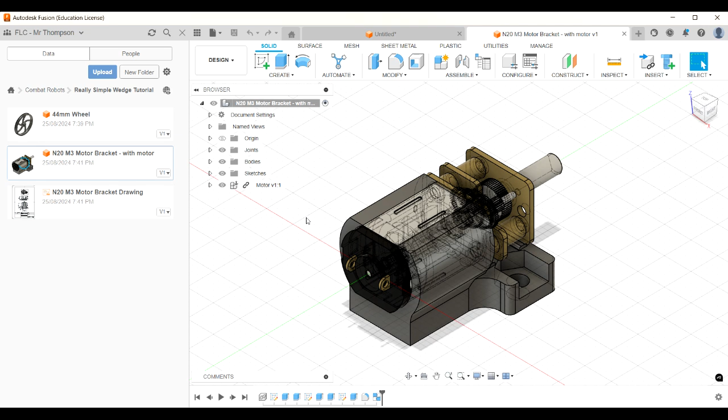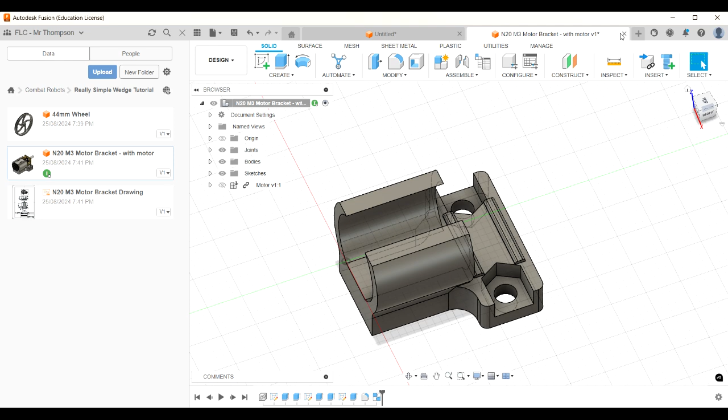I'm going to give you these brackets here. Let me just hide that so you can see. So I've built these brackets, and they're quite nice little brackets. So when you slide the motor in there, it snaps in quite satisfyingly, and it's got these holes there, and you can see some spaces for the nuts, so that you can screw them into the robot body that you design. So let me just close that. I don't need to save that.

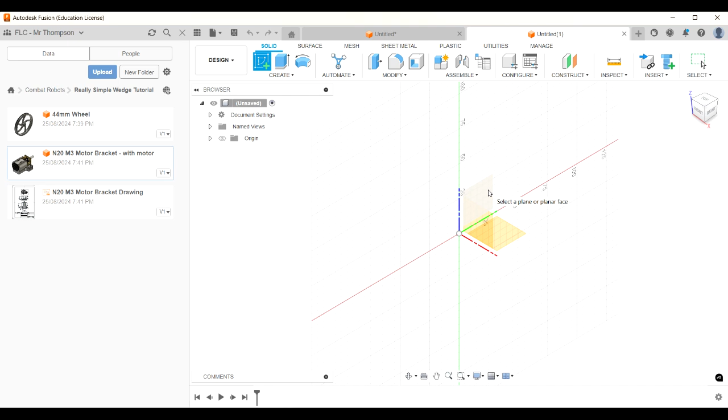All right, so we're going to build something that looks a little bit like that. So let's get started. We'll create a new one. So we've got a brand new model here. And we're going to start by drawing a sketch. So I'm going to click on Create Sketch. I'm going to click on this side plane here, like that. And I'm just going to zoom out. And I'm doing that zoom out, zoom in thing with my mouse wheel, which I find is an easy way to move around.

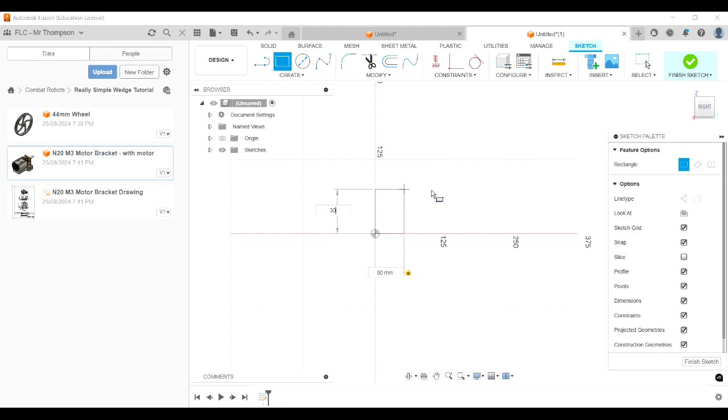Now R for rectangle, and I'm going to click on the origin there, and then I'm going to come out by, let's see if I type 50, and then tab and 30. That's the dimensions I want. Okay, let's just zoom in a bit. And you can see when I use my wheel mouse, wherever my mouse is pointed, that becomes the center of my zoom. So that's pretty handy to know. All right, so zoom in a little bit like that.

Now I'm going to do a circle. So C for circle. I'm going to come up here somewhere and do a circle, and it's going to be any old size, about that big, like that. I didn't specify a diameter because I don't want to. I'll show you why in a moment. Now I'm going to make a scoopy front. A technical term. I'm going to make a scoopy front on my wedge, so that it's good at getting underneath other robots.

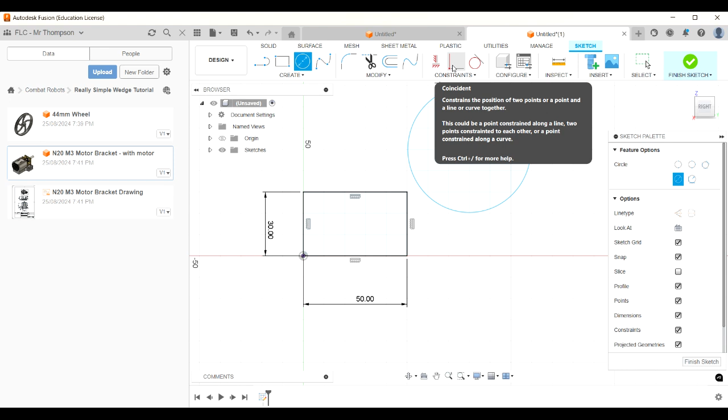Now the edge of that circle needs to be on that point there. So I'm going to use a constraint, this coincident constraint. If you can't see it on your computer, you might have to come down here to find it. Coincident constraint, and I click on the outside of the circle and that point there. So that point and the circle are now constrained to be aligned. So if I press escape, and if I try to grab the center of the circle, oh, I can't do that. Anyway, never mind. It's constrained.

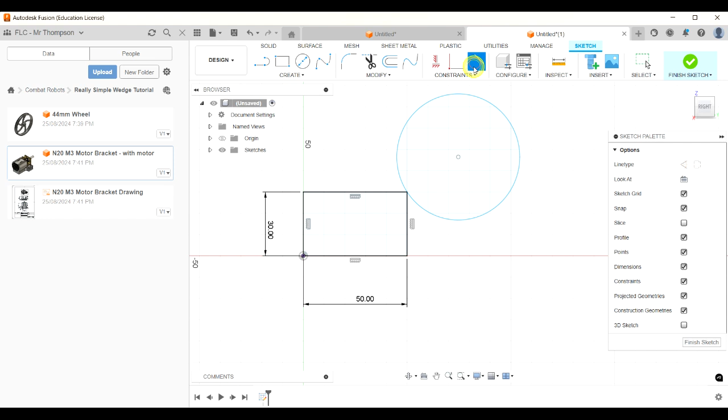Okay, now the other thing I want to do is put the bottom of that circle on that line there. So if I use a tangent constraint, and click on that circle, I can't click on that line, but I can come over and click on that line, and it puts on a tangent as if that line was extended. All right, that looks pretty good.

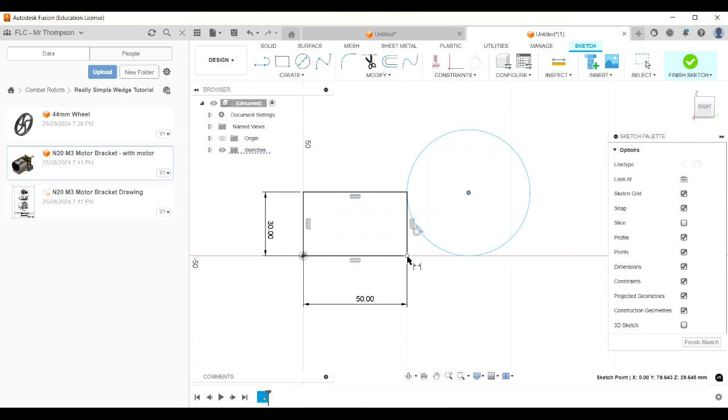Now D for dimension, and I want the distance between the center there and this point here to be 50 millimeters. And the reason I want 50 millimeters is the whole length of my combat robot can't be more than 4 inches, which is about 101 millimeters. So if I keep all the dimensions of my robot, height, width, depth, within 100 millimeters, I'm okay. If I go longer than 100 millimeters, my robot's not legal.

So that's going to be the shape of my robot. Okay, L for line, and I'm going to click on that point there and join it with that point there. And now I'm ready to extrude. So E for extrude.

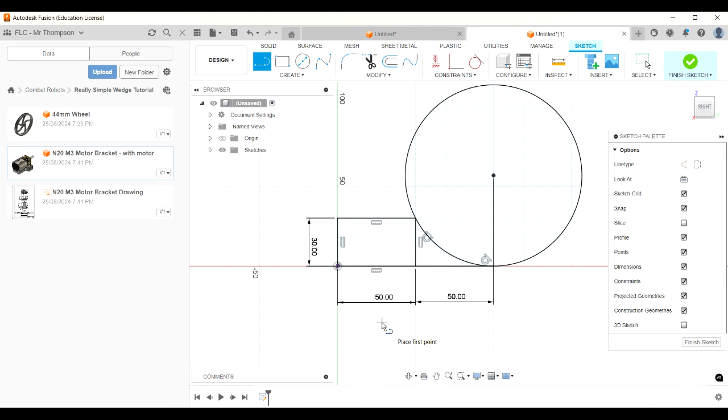I'm going to pick, let's see, that shape there, and I like to click on home so I can see what's going on. Just zoom out a little bit, zoom back in. Okay, I want to extrude both sides, symmetric like that. Symmetric. This is really good practice.

If you're building something that's symmetrical, you should build it symmetrical around your origin point. And the reason for that is you'll see later on when I want to mirror things, it just makes mirroring so much easier because we can use the origin planes as the reflection plane. I'll show you what I mean later, but trust me, you want to extrude symmetrically where you can.

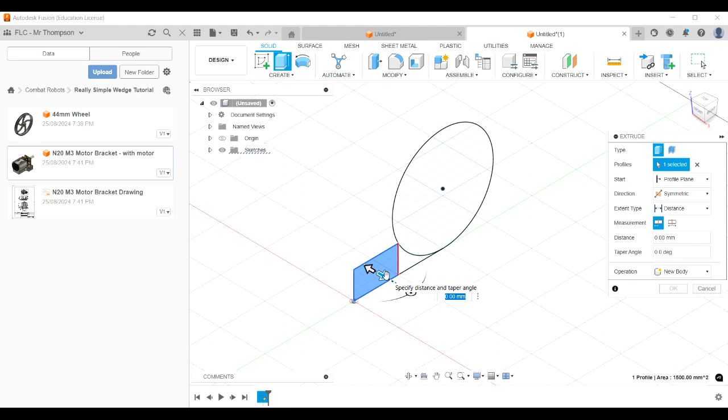So we're going to come out this way. How far do we want to come out? I think, actually, I'm going to come up here. I'm going to go measurement the whole length. I want that whole length there from one side all the way to the other to be 75 millimeters, like that. So whole length, 75 millimeters. Okay, there we go. Now, oh, look at that. It's created a body and it's hidden the sketch.

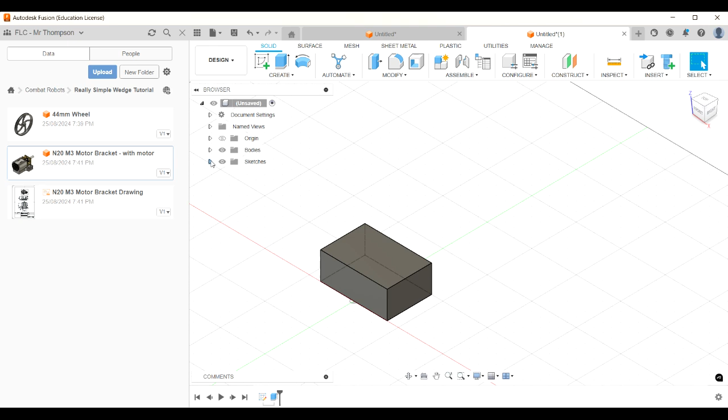Let me just fix a few things up. That sketch that I just drew, I'm going to name that. I'm going to call it, I don't know, the side profile. And that body that I just created, let's call that, actually, you know what? It's not a shell yet, but it will be a shell when I'm finished with it. So I'm going to call that the shell of my combat robot.

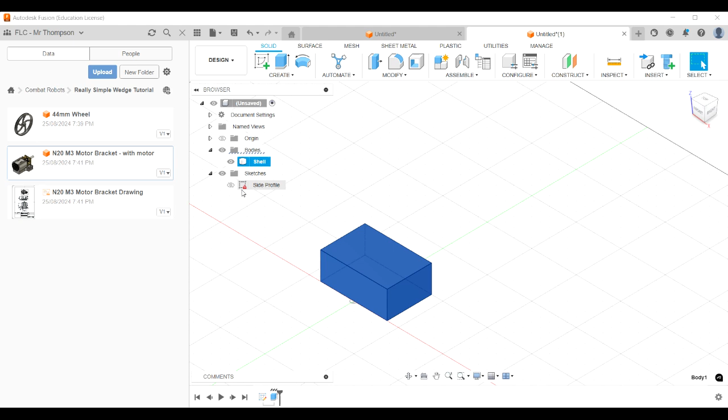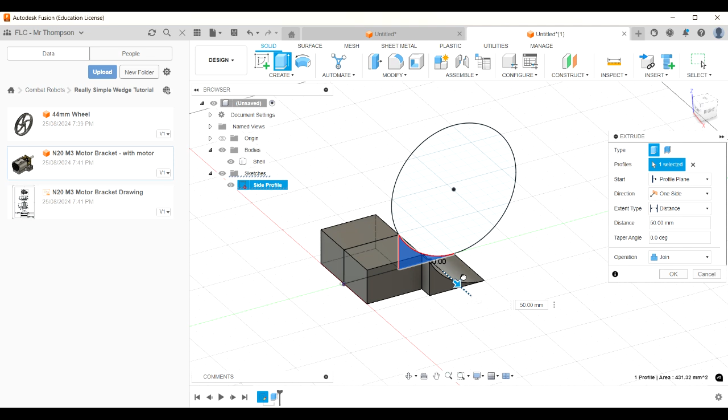All right, so like I say, we're not finished. I'm going to turn that sketch back on because I haven't finished extruding from that sketch. When you extrude from it, it automatically hides. So I'm going to unhide it because I want to do another extrude. So I'm going to come around here, E for extrude, and I'm going to select that profile there, and I'm going to extrude that. Now I also want to extrude that symmetric.

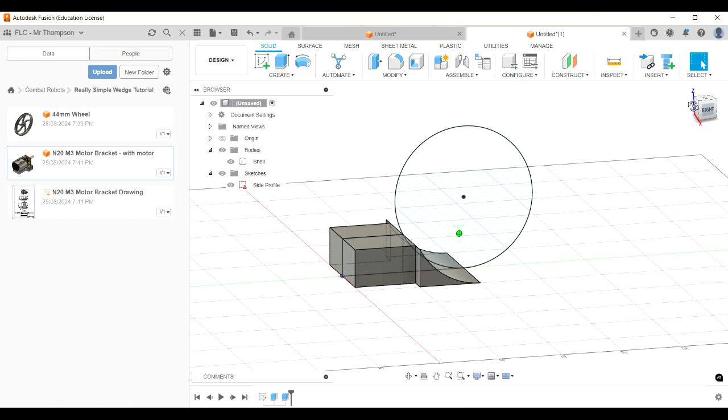Whole length, the whole length needs to be, I'm going to go my full 100 millimeters. I want that to be the full allowable length. It's a join extrusion, which is good. It's going to join these two bodies together, so they're one body, like that. There we go. Now I don't need this sketch anymore, so I can hide that sketch like that. Now that's solid. I want it to be hollow, so I'm going to shell it out.

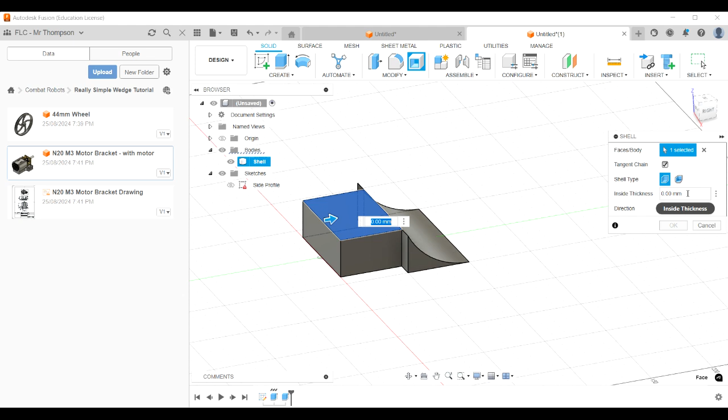So if I click on this shell here, again, if you can't see any of these buttons, you'll find them in the menu underneath. So shell, and if I click on just this top face, then it'll leave that open, which is what I want. Now let's see, I want an inside thickness of 1.6 millimeters. I think 1.6 is reasonably strong, but not too heavy when we 3D print something. And our layer height is 0.2, so I made it a multiple of 0.2.

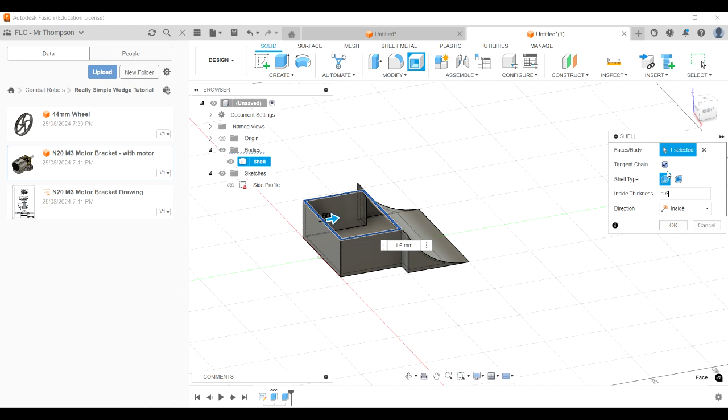All right, the direction is inside because I want that thickness of the shell to be inside what I've already drawn. And I'm going to click OK, and there we have a shell like that. All right, so far so good. Now it's time to bring the motor in. Now, I'm not going to show you this.

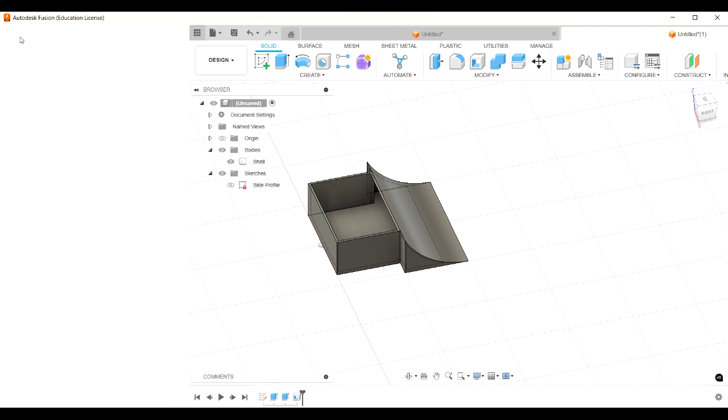It's pretty straightforward. I will put a link to the motor in the description, and you will have to download that motor and the bracket to your computer. It'll be a file, I'm not sure if it's going to be an STL or a STEP file, but anyway, download it to your computer. Then you'll click this upload button. Remember, that's my data panel if you can't see it, the 9 dots. You're going to click on the upload button and upload the bracket with the motor, and then you'll have it here so that you can choose from it.

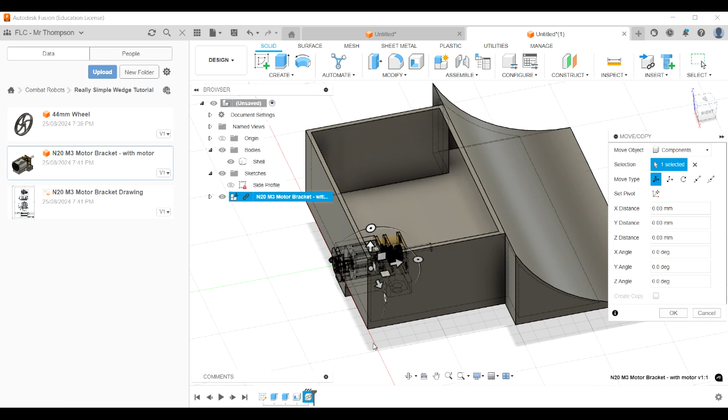So I'm going to grab that, bring that anywhere, just plonk it anywhere. And the first thing I'm going to do before anything else, I'm going to rotate it. So I haven't clicked OK yet. I'm just going to rotate it by minus 90 degrees like that, because that's the orientation I want, and click OK. Now you can see it's not really lined up particularly well, is it?

It's sort of hanging out the bottom there and it's in a weird spot. I'm going to align it right into this corner, and the reason I want to do that is because then I can move it by an exact distance to where I want it.

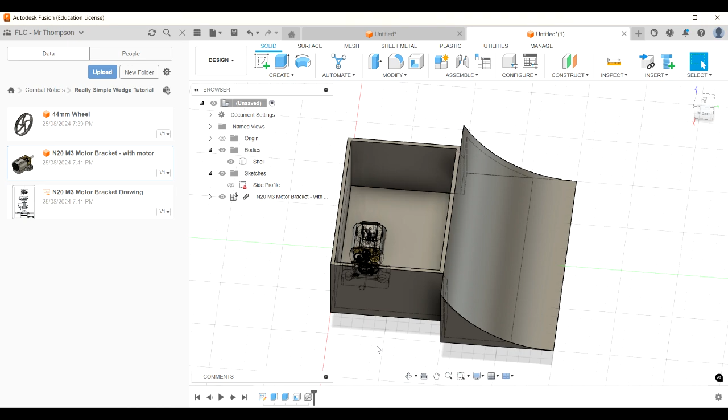So now before I do that, see this little anchor sign here? That anchor sign actually means that that component is grounded to the parent. That means I won't be able to move it around yet. So I'm going to unground it like that. Now I'm going to be able to move it. Okay, so the anchor sign's gone.

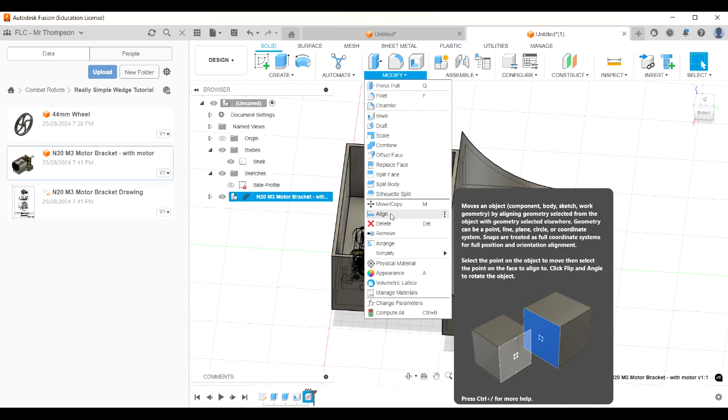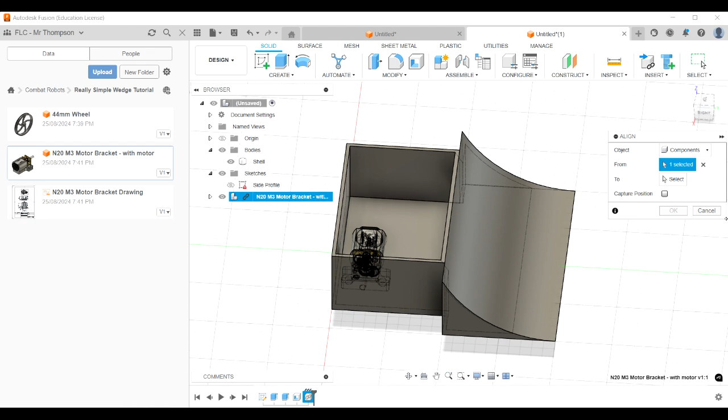So first I'm going to select the floor, the inside floor of my, well, actually, you know what? I won't do that. I'm going to select the back wall, the inside of the back wall. Now, not there, not there, don't want that. I just want any old boring, ordinary place on the back wall like that.

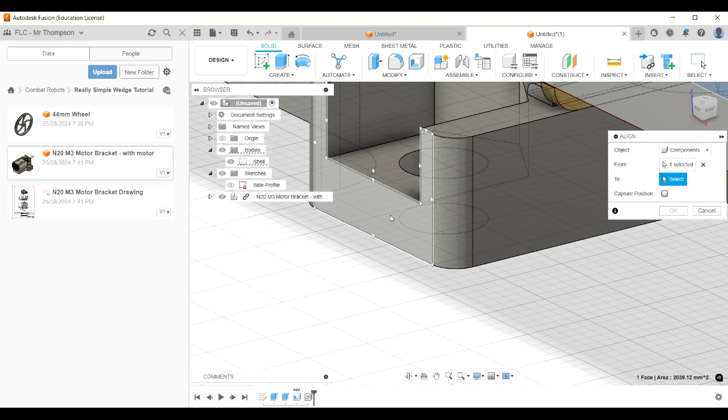Click like that. And then I'm going to select my other face, which is this one down here, that one there. And when I click on that, again, not in any special spot, just a boring part of the face like that. I don't know if you saw that, those two are now aligned. So if I scroll this around, you can see that they're aligned.

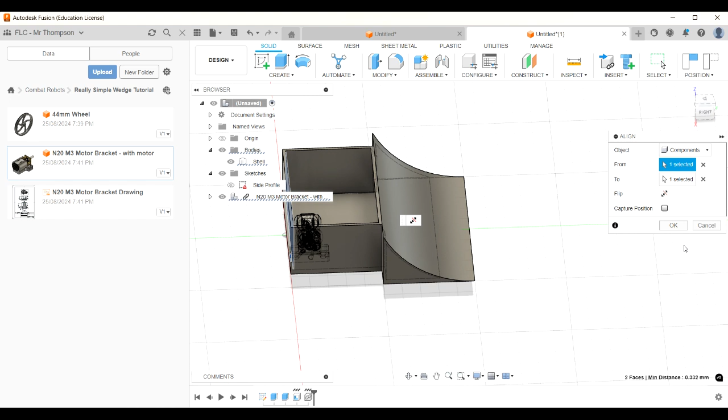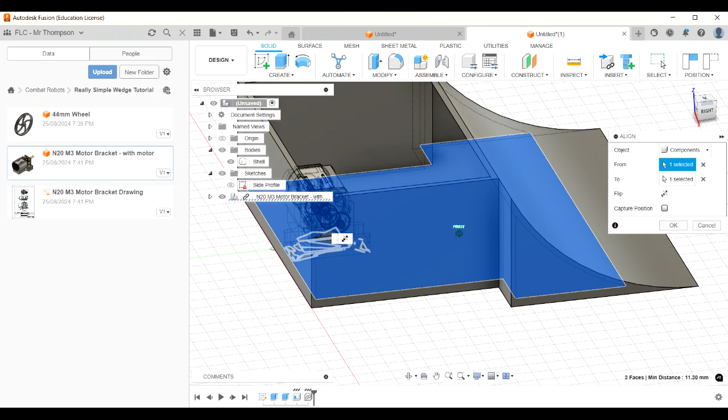Okay, I want to do a bit more aligning. Actually, I won't click OK because I can just keep doing this aligning until I get it right. So again, I'm going to select the floor here, the object I want to align to, and then the object I want to move: I want this base of the bracket to be aligned with that floor that I just selected first. So if I click there, okay, that's aligned. Good.

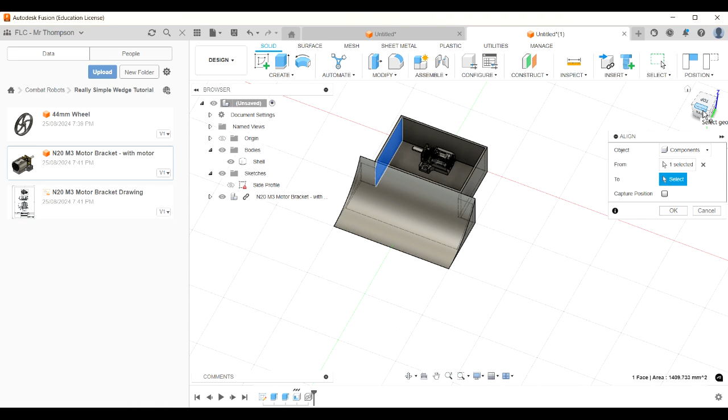All right, and one more alignment I want to do. If I come around, let's see, yuck. All right, there we go. I want to choose that wall there. So again, not the center, just a boring place on the inside of the wall like that. And then I'm going to come around like this and zoom in because I want the front of that bracket to line up with that inside wall that I just clicked on, like that.

Okay, now I'm going to click OK. Let me just click on top there so you can see what's going on. So that motor there is sitting right in the corner. Now, I actually don't want it to be there. I want it to move out a little bit, but because I've started it there, I can move it by a certain distance and know exactly where it is.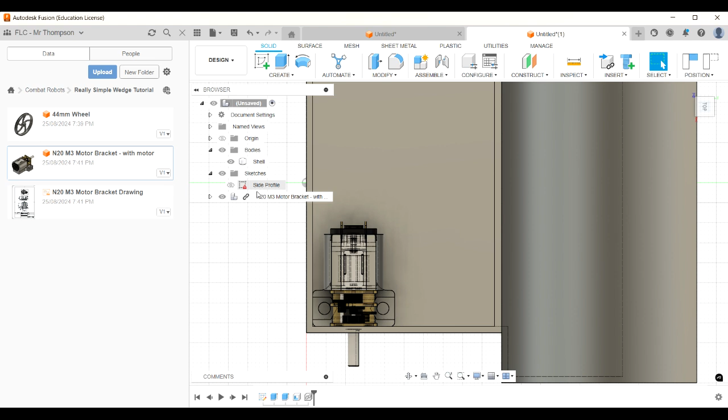So in my browser tree, I'm going to click on that motor and bracket. Then I'm going to press M for move, and it gives me some arrows here. It's already got Move Components, which is good because I selected a component. And I'm going to move this.

I move this 13 millimeters. Now why is that? Because I know that my battery is 15 millimeters wide. So from here to here, I want that to be 16 millimeters. And I know that from here to here, that distance is 3 millimeters. So if I move my motor out by 13 millimeters, then this wall is going to be 16 millimeters from here, and that will fit my battery in behind the motors quite nicely. So I've done that.

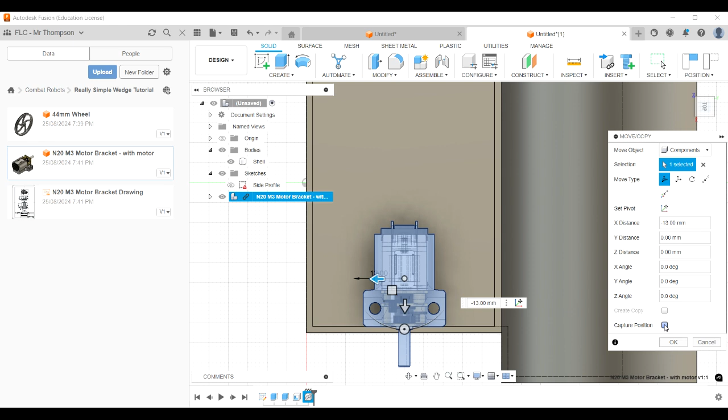Now the other thing I'm going to do before I click OK is capture position, and that finalizes the position. So all the moving and alignment I've done is finished now, and it puts that captured position on my timeline. Okay, like that. Click home so we can see. All right, that's pretty good. Now I do want another one on the other side, but I'll show you a quick way of doing that later.

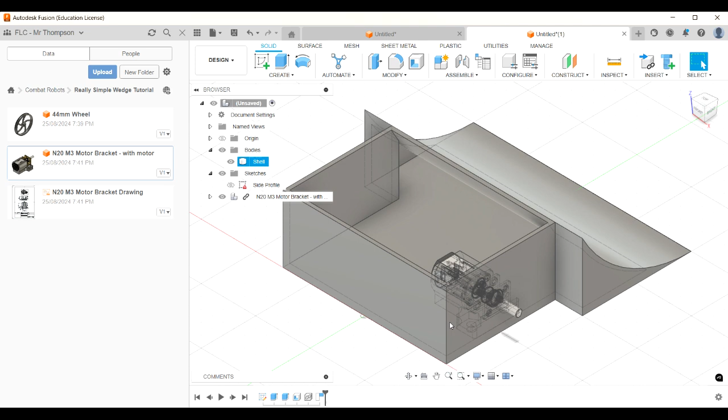First, I'm going to finish this side. So now let's see, at the moment my axle's just sticking through the wall. I need to cut a hole so that in real life I can put that in place, because in real life you can't have two things in the same physical space, can you? All right, so I'm going to draw a sketch.

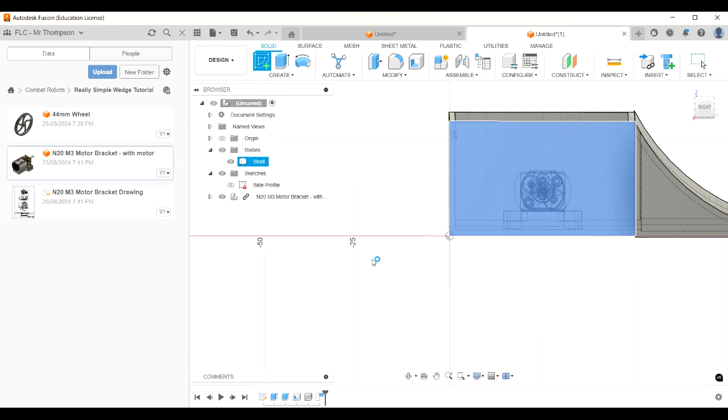So create a sketch here on this outside side wall, like that. Let's zoom in so I can see what's going on.

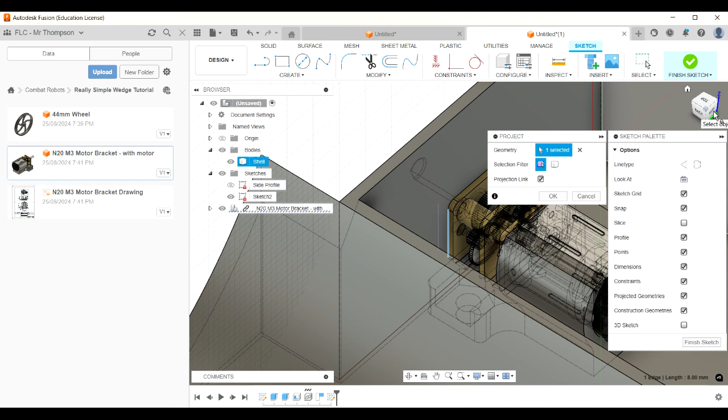Now I want to project some lines from that bracket into my sketch so that I can use them to cut out a shape. So I'm going to do P for project, and come around here like this. I'm going to choose that line there, I want that line as part of my sketch. I'm going to choose that line there also as part of my sketch.

And if I come back around to the front here again, I'm just going to click on the front of that so it's square. If I click on where it says right, that squares everything up. I'm going to zoom right in here.

I would like to select that circle there, but it's not letting me do that. So I'm going to come up here and click selection priority, select edge priority. Instead of trying to select that face on the front, it's not letting me do it. I'll try again. Selection priority, edge. There we go, that's working.

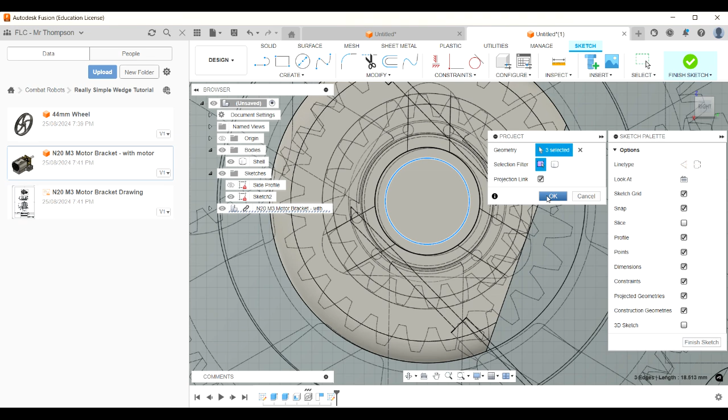So if I click on that edge there now and go OK, now that edge is in my sketch. Can't see it very well, but it is part of my sketch, so I can use it. In fact, more importantly, the center point of that circle that I just selected is in my sketch.

All right, now, I guess what I want to do now — you know what, I probably didn't even need that. Never mind.

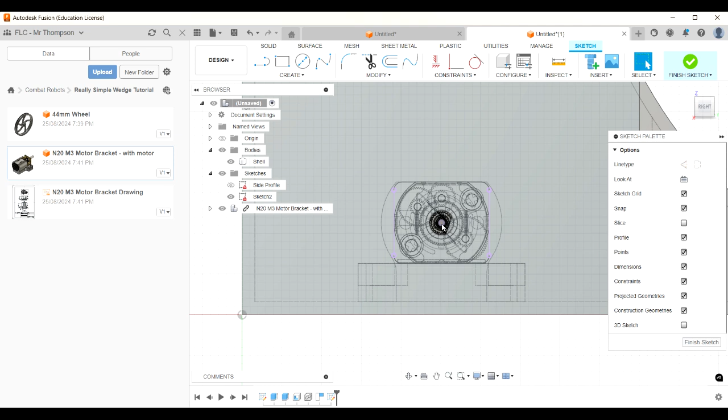We'll keep going. I'm going to do R for rectangle. I'm going to draw a rectangle from this very top here, and draw it down to about here. Now, that's not its final position, but that's okay because I'm going to use constraints to line it up.

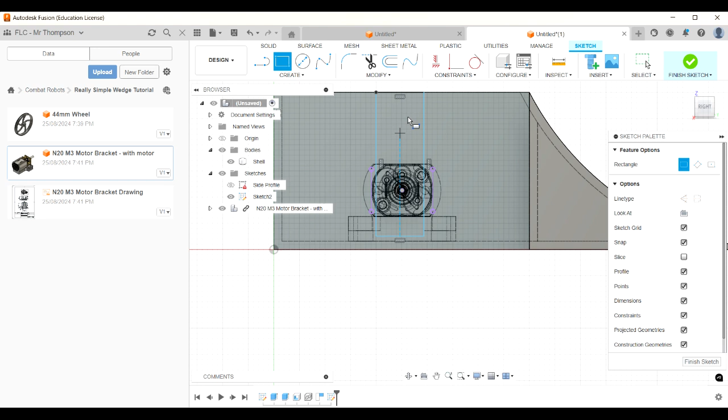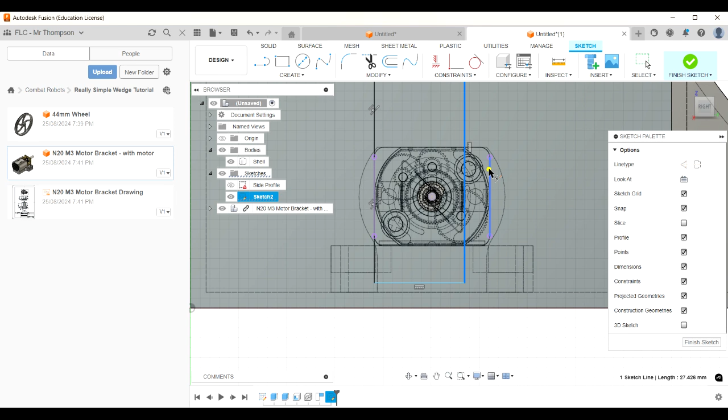So I'm going to come over here on constraints and use a collinear constraint. That means it lines up two lines. Remember I put that line in my sketch, so I'm going to say I want that line and that line to be collinear, I want them to line up. And that line and that line I also want to be collinear. And that line and that line I want to be collinear.

You know what, I didn't need that center point after all, did I? That's okay, doesn't hurt to have it. All right, so there's my sketch, you can see I've got a rectangle here. I'm going to cut that rectangle out.

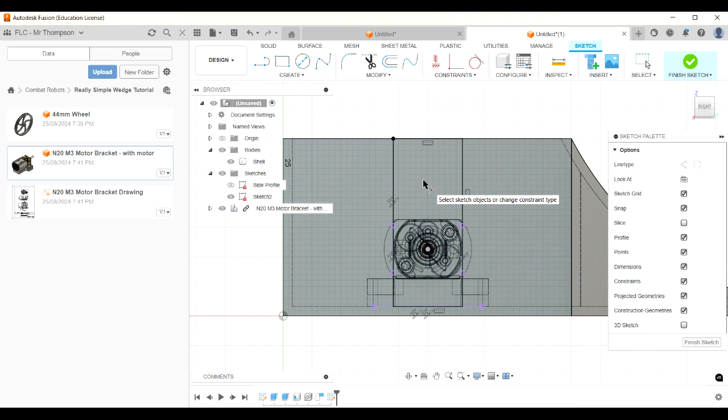So E for extrude, E for extrude. Now, actually, I'm going to do a cut extrude. So I'm going to click on that profile there, and cut it back this way. But I don't want to cut my motor or my bracket, I only want to cut the shell.

So what I'm going to do is just hide the motor and the bracket at the moment because I don't want to cut that. Oh, actually, I just noticed that little hole there — I want to make sure that's included in my cut. I don't want to leave a little gap in the middle there like that. Okay, that's better, that's working.

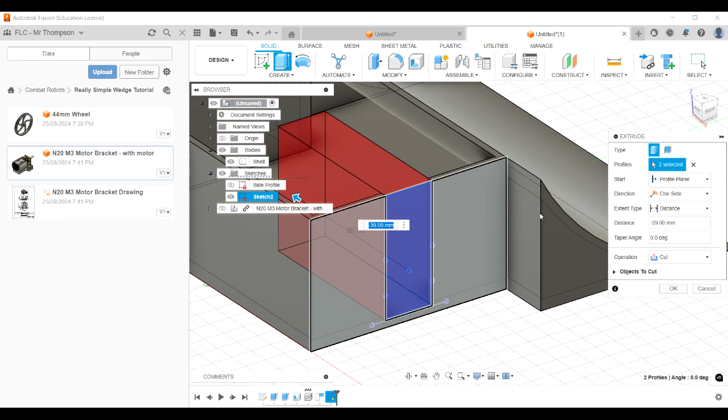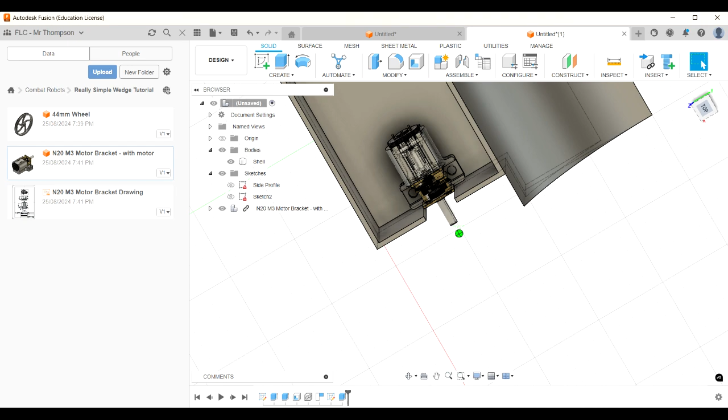Okay, now objects to cut. So if I scroll around using my view cube to the back face there, or the other side face, and click OK — that's cut. Okay, and now I can turn my motor bracket back on, and I can see what that's done. That's created a nice little hole that my axle can stick through, and that'll stop all my wires from getting in the way of my wheels.

Okay, we're pretty close to being done. Let's go to the top. What I want to do now is put some holes so that I can fit some screws that are going to hold this bracket in place.

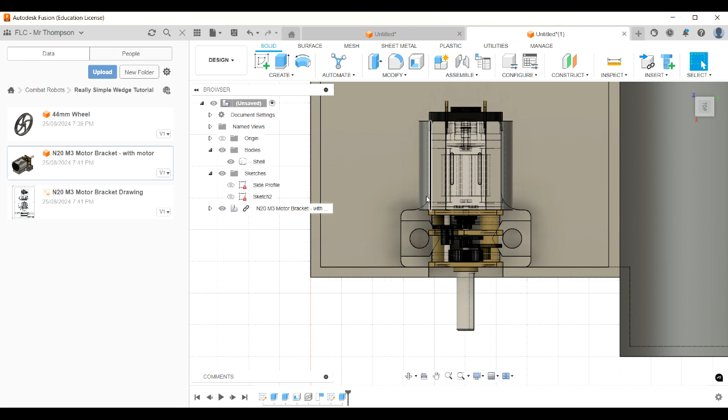So I'm going to do a sketch on the floor, like that. And if I come over here and do P for project again, I'm going to project that circle into my sketch, and that circle into my sketch, and go OK.

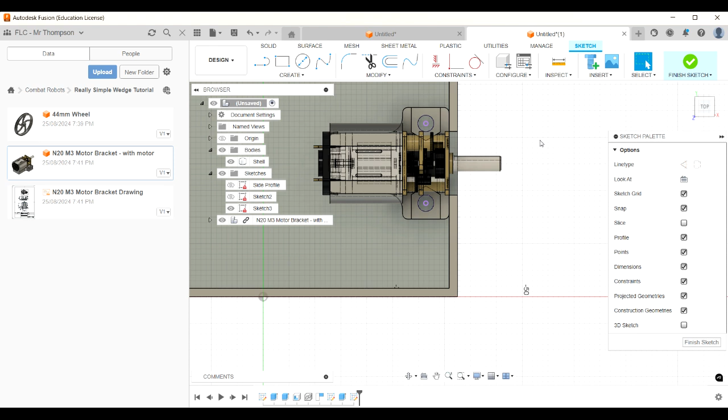Now that those circles are in my sketch, I can do E for extrude, and extrude those shapes, those circles. I'm going to extrude to object, because I want to extrude them all the way down to the bottom, creating a cut extrusion all the way through the bottom of my shell. Okay, like that, and there we go.

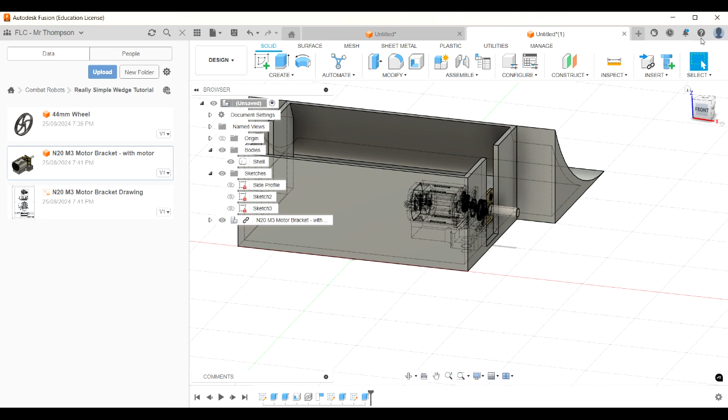So now we've got holes all the way through the shell, and they're perfectly lined up with where I want my bracket. Now you're probably thinking we've got to do all of that again over on the other side, except we don't. We're going to use a shortcut.

We're going to mirror. So I'm going to click on that bracket here in my browser tree, and create a mirror. The object's already selected because I selected it first. If I click on mirror plane, because we were clever and built our body symmetrical about the axis, I can use that.

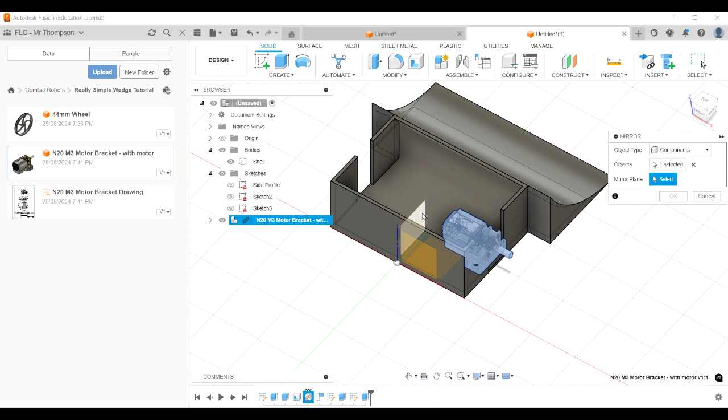Or about the origin, I can use that axis plane there as my mirror plane. I don't have to go and build a mid plane or anything like that. So if I click on that, you can see it's going to create a mirror like that. If I click on OK, there we go. And we've got the other one in.

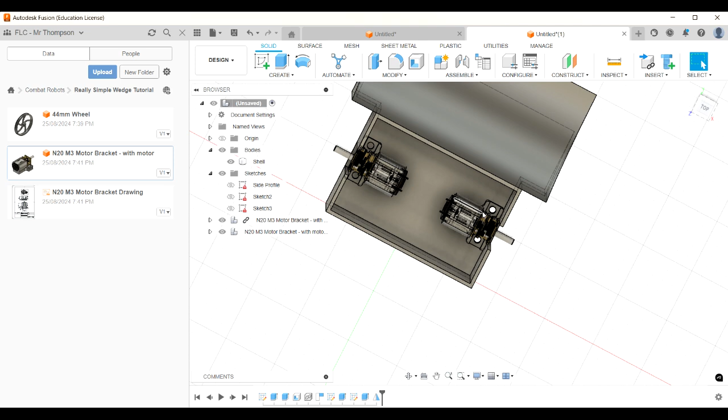Now the only thing I haven't done is I need those holes in there as well, so I can mirror those too. Again, I'm going to click create mirror. Last time we mirrored components, it selected automatically because we selected a component before we chose mirror. This time I want to select features.

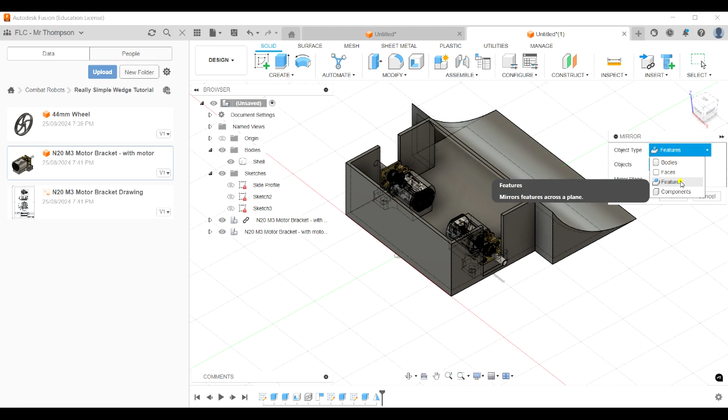The features I want to mirror are these holes, so I'm going to click on those holes. My mirror plane again is going to be that plane in the center. And for the type, I find optimized works. I'm not really sure the difference between optimize, identical, and adjust, but if one doesn't work for me, I just try another one.

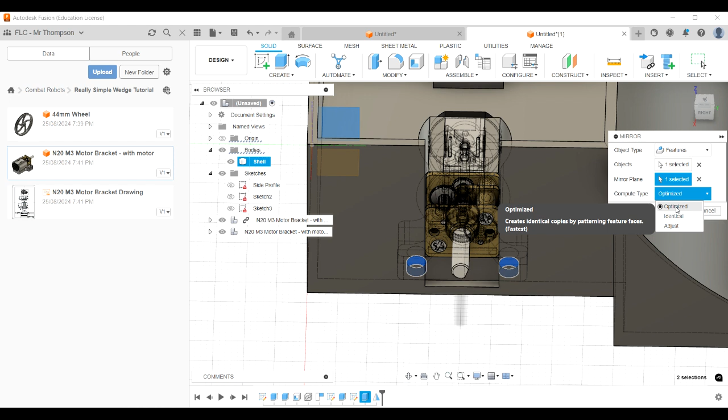Sometimes you get weird results. I find optimized tends to work nicely. So if I zoom out and zoom back in, and press OK, like that, if I scroll around like this, there we go - we should find that there's holes in the bottom on both sides.

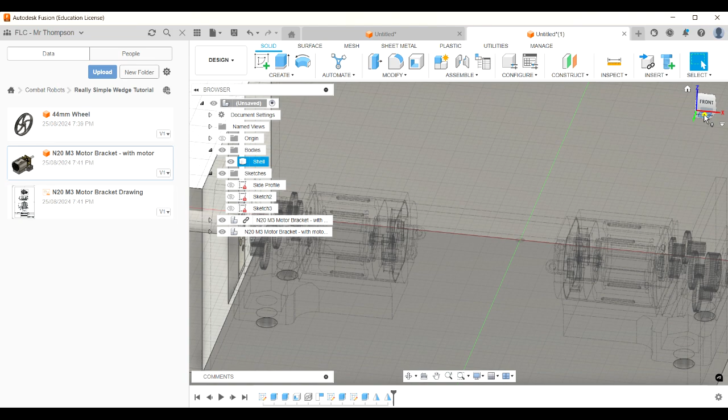Okay, and you know what, that'll do. We will create a lid in another video, but I think now is probably a good time to stop and 3D print your chassis, 3D print your shell, and practice putting it all together, making sure everything fits.

Once we're happy that everything fits, you know what, you could even race that around without a lid on it. We'll come back later and put a lid on. So, okay, let me just quickly show you - you probably know this already.

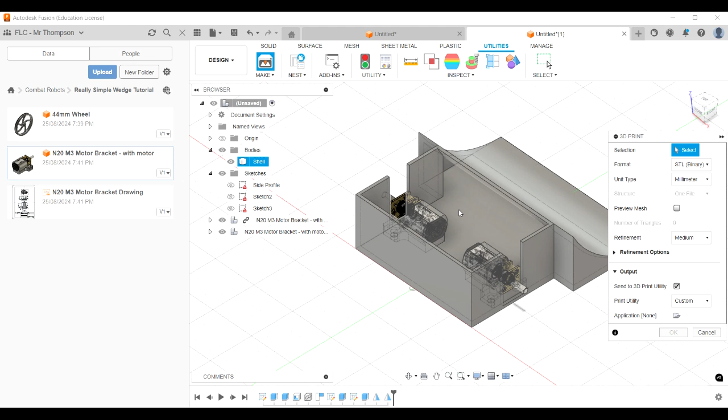To 3D print it, we're going to click on Utilities, then Make. We're going to select the shell body, so not the brackets, although we can print the brackets as well, but we'll do the shell. Then you're going to untick this box here, because you won't have the slicer on your computer, and click OK.

And then there's the shell - because we named the body 'shell', that's good. We're going to save it to my computer, into the folder you want to save it into. Click save, and that'll export the STL file, shell.stl. Wherever you saved it, you can copy that onto a USB port, take it to the computer with the slicer, slice it up, and send it to the 3D printer.

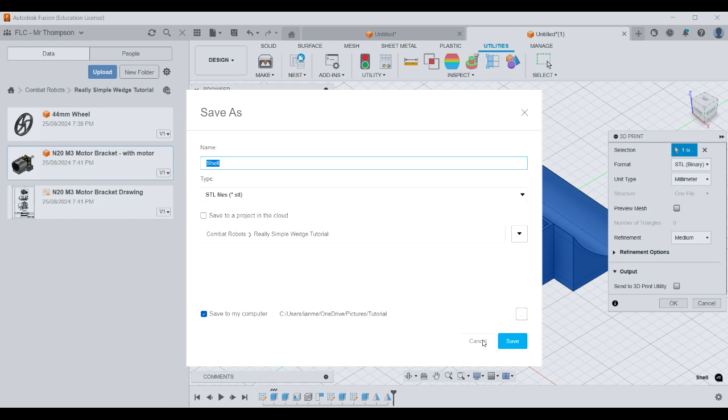All right, you'll click save - I'm not going to bother. Okay, all right, I think that'll do for this video.